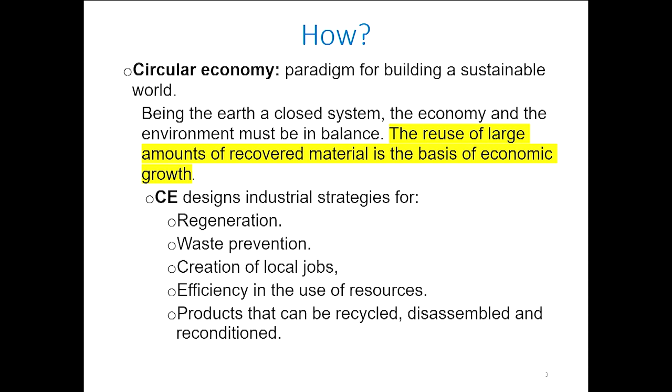And then how to do it? Well, we have to be based on circular economy, whose main objective is to keep reusing most of the materials that have been extracted already, that are already circulating. We have to rely on that, only to extract what is needed for the growing population, but not for more.

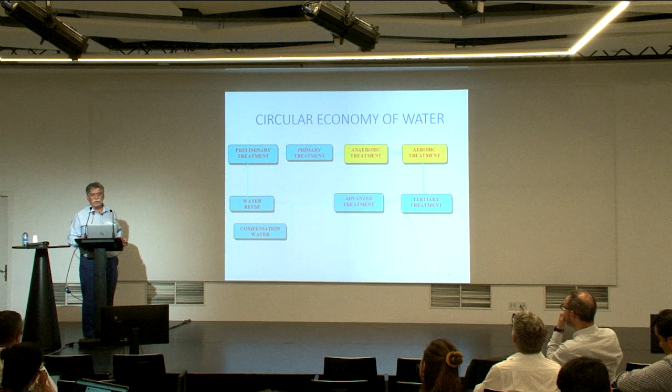So for water, what's a circular economy? What we all know. We have to give the treatment train to keep recycling it and only add some compensation water. These cycles can be done at the smallest cycle, let's say in a building, in households, or in a factory, but also in a city, in a country. But we have to work on that and only add water that is needed for compensation.

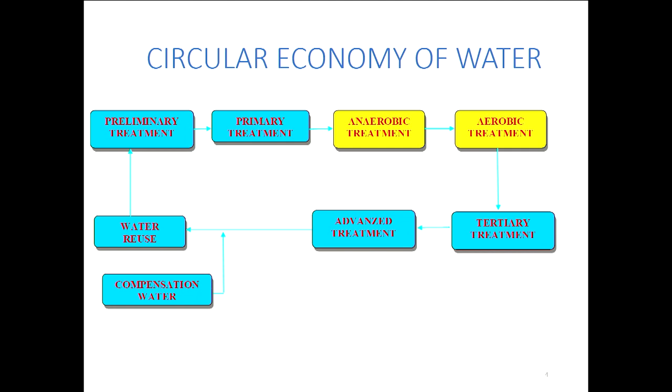So what will be the principles for circular economy in water? Well, use what is now called nature-based solutions in decentralized treatment, segregation at the source of the effluents, and most important, the people's participation. We have been used to thinking that our environmental problems, our lack of water and all that, the government is going to take care of. But this is not going to be anymore.

So, what are nature-based solutions? Well, they are processes inspired by nature to face all these challenges, principally climate change, by creating microenvironments which return the climate we still have or are losing, and make lots of nice microenvironments.

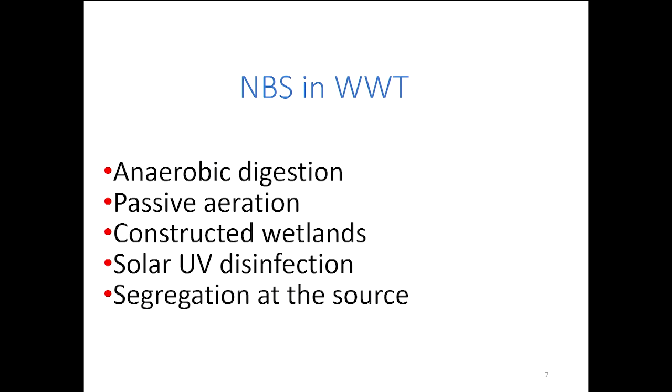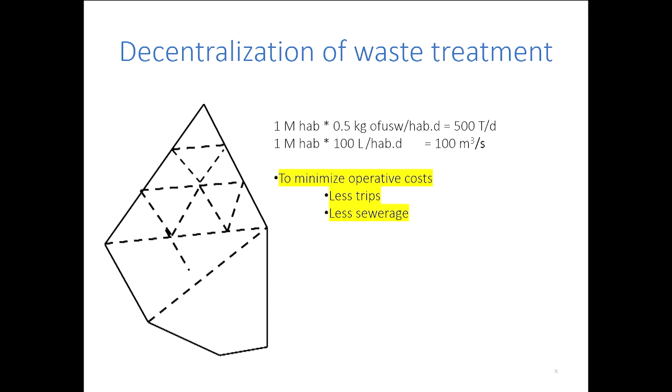So decentralization means, for example, this is the polygon of Mexico City, that instead of having a huge treatment plant outside of the city where all sewers are directed to be treated, we have to build smaller treatment plants, and also for solid urban wastes. They can be treated together to minimize operating costs, transportation, sewerage, etc.

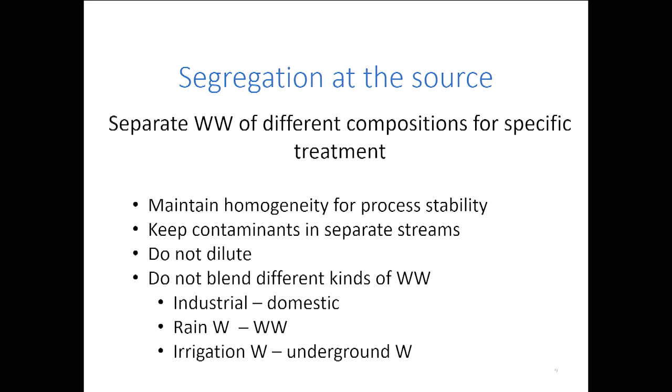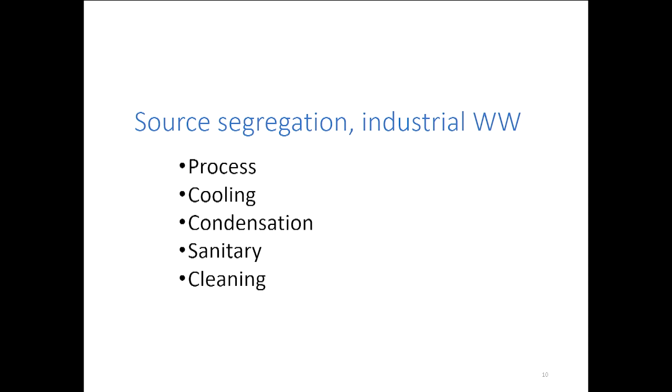Segregation at the source is not to blend different kinds of wastewater. The difficulty in operating wastewater treatment plants is that the variability of the influent is so high that they are so inefficient, they have to be so big, they cost that much. So try to maintain homogeneity for the process. And industry does it now. Industries that treat their waters don't mix these streams. They separate them and treat them separately, and they know that they save a lot of money. Well, we can do that for the cities.

There is a large current of sanitary engineers that work mainly in Wageningen, working on separating the effluents, not at one household level, but at big units of households, buildings and condominiums, to treat them separately because of the different characteristics of the waters.

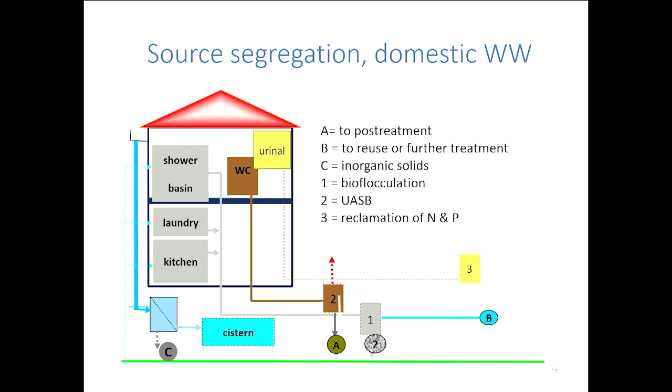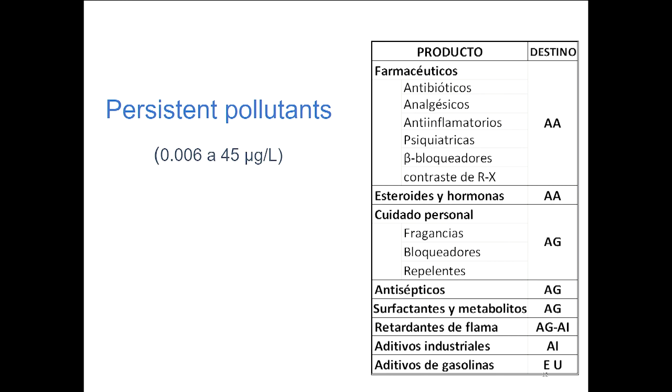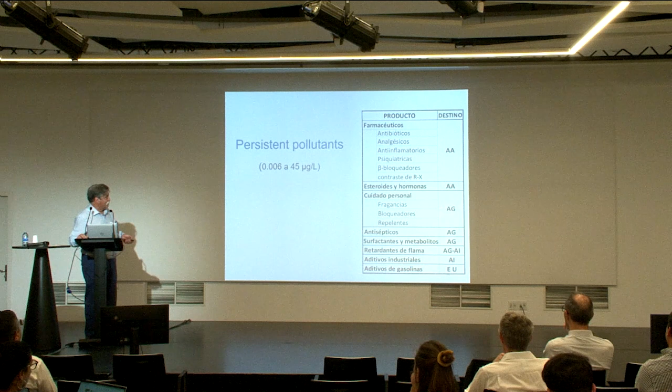Because of things we have been talking about: how to treat these persistent or emerging pollutants that are in very low concentrations, how do we measure them in the first place, and how do we remove them? Well, the best thing to do is not to mix them. So if we can separate the yellow waters, aguas amarillas, or the gray waters, which contain fragrances and all the things we use for our personal care, etc. So the idea is not to mix them.

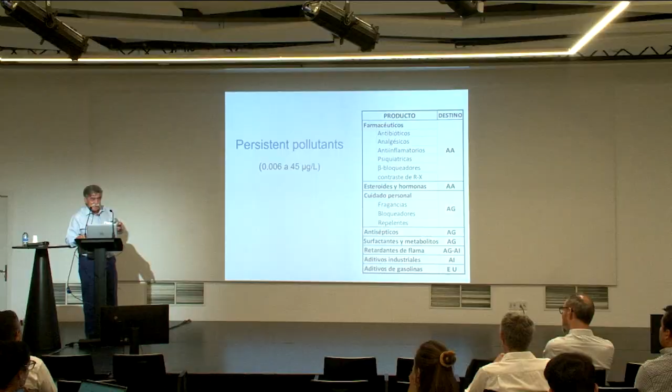Yes, I know that many people would say, oh, come on, this is not going to happen. It has to happen, because cities are changing every day. We see that we are concentrating in these buildings, so we have to move in the way we are going to do sanitation. And so we go to the point I was going to treat, potable reuse.

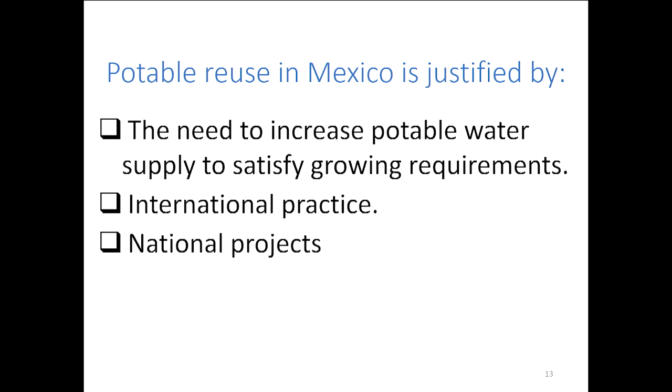It is justified because there is a need to increase the availability of potable water for the inhabitants, the people. International practice doing that now exists, and there are some cities in Mexico that urgently need to do that, because there is no other source of potable water.

So, for example, in central Mexico, where Mexico City and the surroundings are, there is an over-exploitation of the 14 aquifers there. But the problem is that more than 50% of the households don't have daily water supply. They have to rely on two or three times a week for water to come into the homes.

In 14 of these 80 cities in central Mexico, 90% of the households have no daily service. Mexico City itself, the capital of the country, has 24%, so that's a shame.

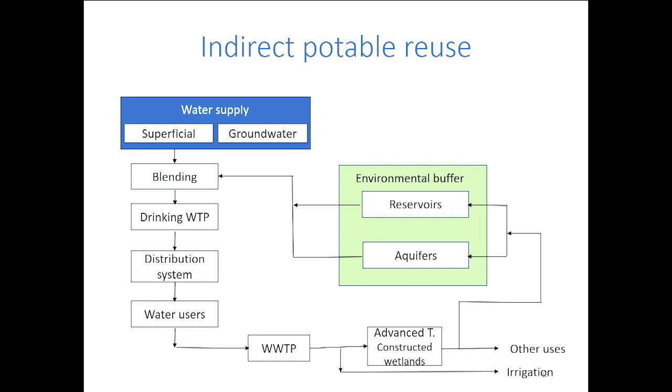In total, in this area, which has 29 million inhabitants, or 25, 10% of them won't have their daily needs met. So we rely on potable reuse. Potable reuse is to treat water with advanced treatment, then use an environmental buffer, which are artificial or natural reservoirs or aquifers, and blend them with incoming water. This cycling can reduce the need for more fresh water.

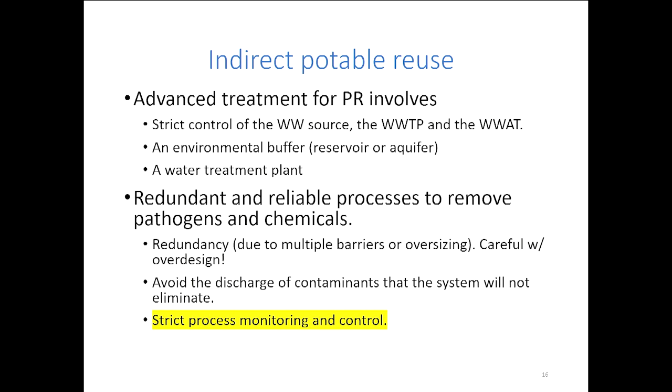Of course, to do this, we need a lot of control, a lot of monitoring, a lot of rules. We have to have strict control on the water source. You don't mix waters, because if you design a certain process to remove certain contaminants, you can't expect it to remove other contaminants. So you have to be very clear, very sure of what you are going to take care of. Multiple barriers, oversizing, but take care not to over-design, because then it will be so expensive that nobody will go in.

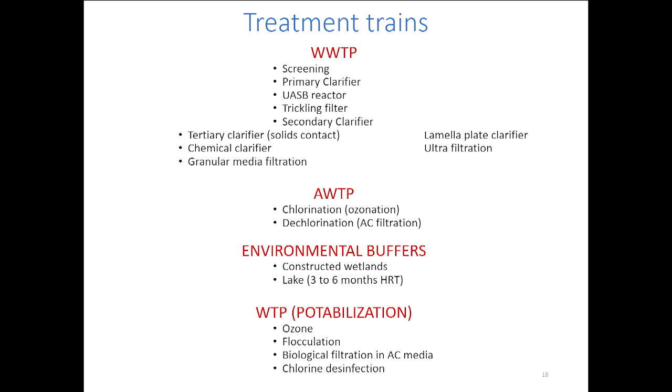So we enter, at least in Mexico, an era of strict monitoring and control of plants. In international practice, you must have heard all over the world that there is this need for potable reuse. And in our neighbor country, we have three plants close to us that we can follow. In the treatment trains, you can recognize the preliminary treatment, primary treatment, tertiary treatment, then advanced treatment, then going to the environmental buffers, which can be constructed wetlands and a lake, and then the potabilization, which we call the water treatment plant.

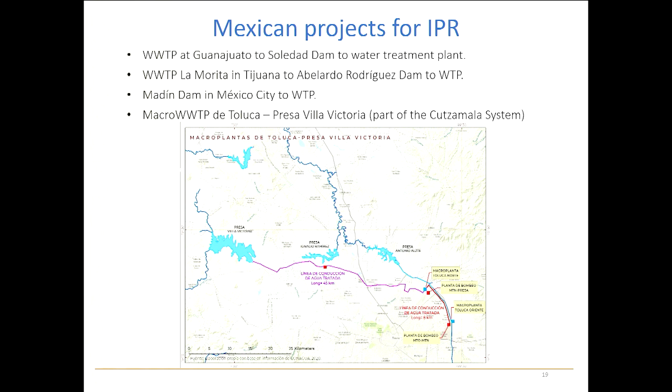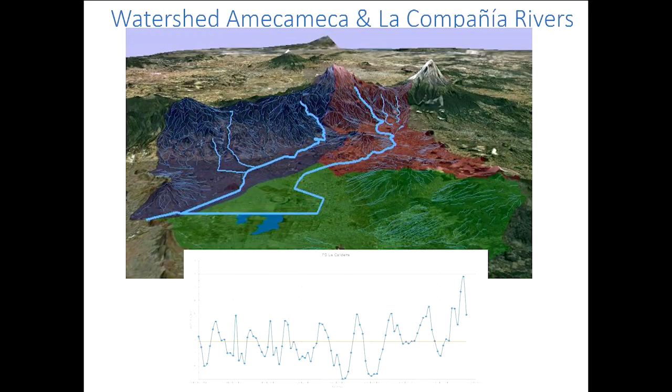But we are expelling, on average, 2.8 cubic meters per second from there. They drain all this watershed and go to another watershed as untreated wastewater to irrigate 100,000 hectares. The wastewater treatment plant, the largest wastewater treatment plant in the world. But it's awful. It's a crime to do that. So we have to retain this water.

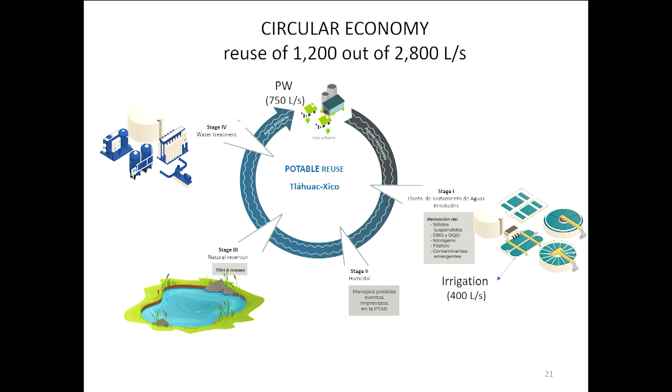So this project focuses on recovering 1,200 liters per second out of the 2,800 liters per second in this circular process. Wastewater treatment to a secondary level, then use this for irrigation, some 400 liters per second, then go to the constructed wetland, then to the lake, then to the potabilization tank, and then provide the city with 750 liters per second. That's the objective, using the whole treatment train.

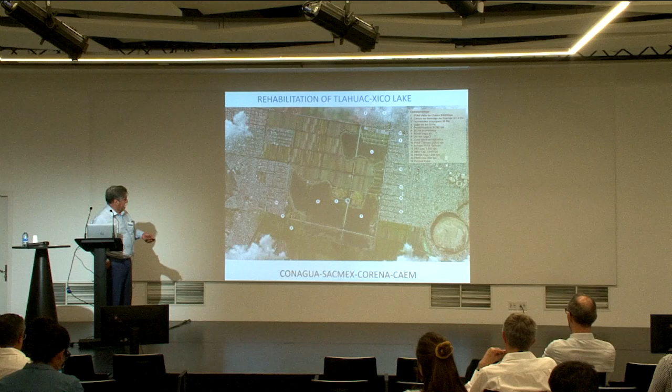So this is what we'd like to see. This small lake is 500 hectares. It is surrounded by this city called Valle de Chalco, and this other city, Tláhuac, and they both produce their wastewater to be treated in a plant here, and this side to be treated in the other plant. Then the effluent is put into the constructed wetlands, which are here, and stays from 3 to 6 months. We have to see that, and then it goes to potabilization and is distributed in this place. This is work done by many government institutions, with CONAGUA, the National Water Authority, leading.

What we are starting to do is a constructed wetland here, just by the lake, which is going to receive water from a well-established but somewhat distant wastewater treatment plant called Cerro de la Estrella, and see the result of treating this relatively good effluent in a very large constructed wetland, 58 hectares. This will be 100 liters per second in these 58 hectares, giving about 1 month of retention time. Then it will be potabilized. First we see the result here, and if it comes out well, a potabilizing plant will be constructed. So this will be a large-sized pilot plant.

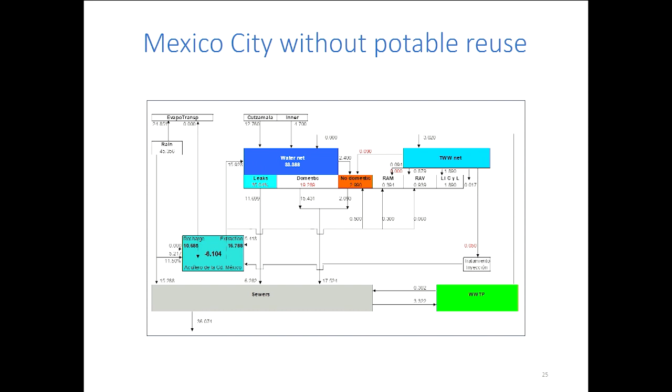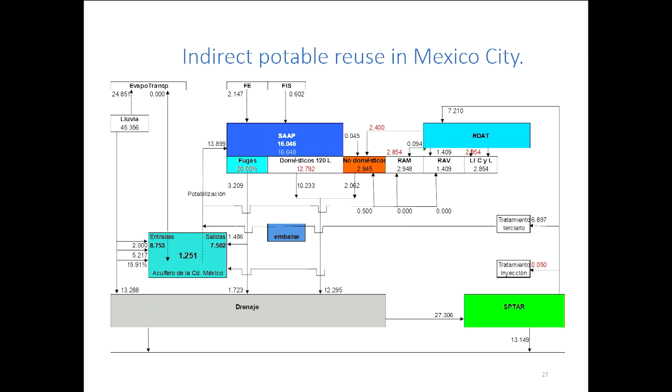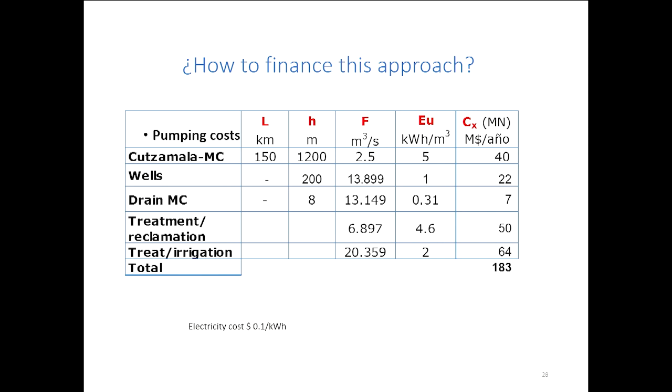I think I don't have time, but we have a lake, a 100-hectare lake, Texcoco, which can be used for a project like that, in order to recycle almost seven cubic meters per second into that lake and others in our valley, to reverse the very bad management of water, which consists of bringing water from 150 kilometers away from the city, elevating it 1,200 meters at a very high cost. This will make a change. It won't be cheaper, but it will go toward sustainability.